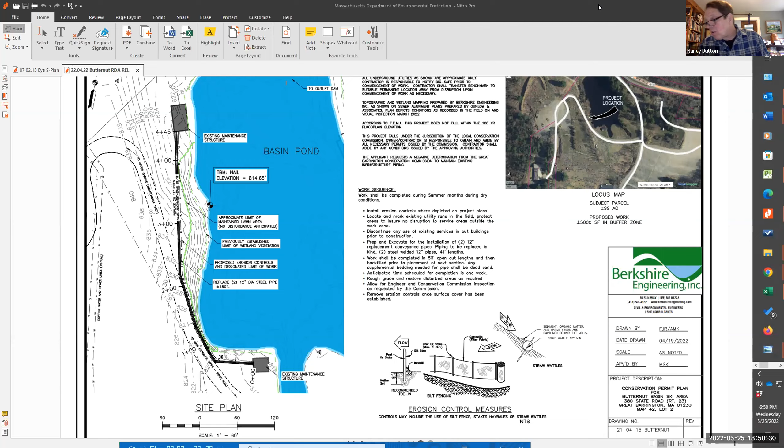Are we ready? Yep. I make a motion to issue a negative number 3 for the notice of intent. I'm sorry, for the RDA. Second. There we go. Okay, we'll vote by roll call. David? Aye. Michael? Aye. Andy? Aye. Andrew? Aye. And I vote aye as well. Thank you all. Thanks, Mike.

Sounded a little like a border collie. At least it wasn't my dog. Well, that's what my border collie says when the UPS man comes.

Okay, let's see. Up next, an RDA from Colin Kemble, property at 275 Division Street, map 33, lot 40U. The work proposed is constructing a single family house and related site work. Who do we have for that? We may not have anybody. So this is the one where they don't have any plans. They just want to know whether they might be able to build a house. This is by AIER, correct? Yes.

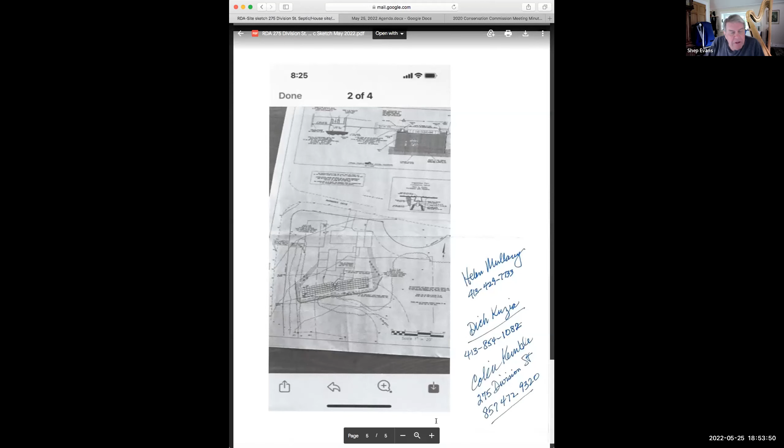That's the idea. The prospective purchaser has filed this RDA, and I circulated to everybody that went on the site visit, and I think to everybody else too. I'm not sure. The aerials from MassGIS and Mass Viewer map, and an excerpt from the septic plan from 15 years ago. There you go, done by Mike Parsons. Excuse the handwriting on the right.

But this is the lot. That's the driveway to AIER coming up on the left, and then the little private road going in on the right, and the curved bit on that road is supposed to be a circle, which was never built. In the meantime, this is an open grassy field. If you look down here at the bottom, that's trees right there. That's big pine trees. And over on the right-hand side, connected to that, is more trees. And everything else is open grassy.

There's an intermittent stream, which is a drainage coming out of Barbieri Pond, which is up to the north, which comes down just sort of through the eastern end of that circle and continues on down. And there are wetlands down below on the left.

Thank you, whoever did that. Is that you, Kate? Yeah. Yeah, good job.

So the idea is this: it's high and dry. If they can keep everything out of the 100-foot buffer zone, of course that's exempt. And if they can get the septic system in between the 100-foot buffer zone and the 50-foot buffer zone of the wetlands to the south, that would probably be allowable. And that's about the best that I think the commission can do, is to say that it looks like it was permitted once upon a time, and there's a good chance it might be, as long as they stay as far away as possible from the wetlands.

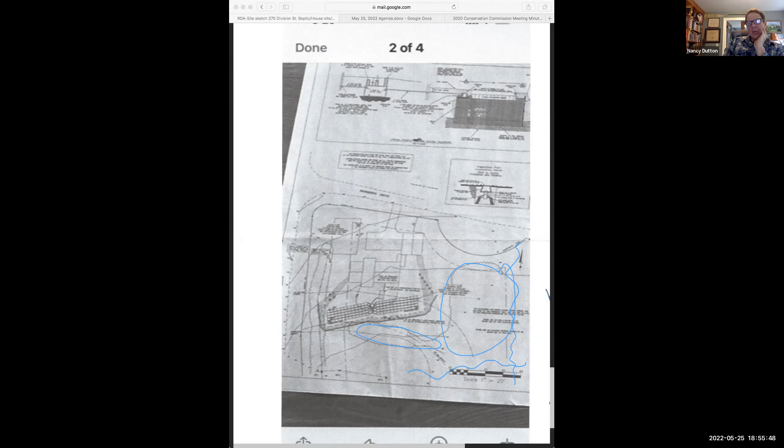When we do a motion, can we really issue... no, we're not really. All you can do in this situation is to issue a sort of an editorial comment in response to the well-intended but not necessarily conclusive request for determination. And this is a 15-year-old map, so that's not helpful, and this is not a building plan that belongs to the potential buyers. So I think we could just say that anyone could build something in an area that's not jurisdictional.

So if we say that the property was permitted before, and if they stay as far out of the buffer zone as possible, then it's likely that we could permit it. But there are no guarantees. A new survey and new plans that are relevant. Right. If it's in general keeping with the previously approved plan, it's something

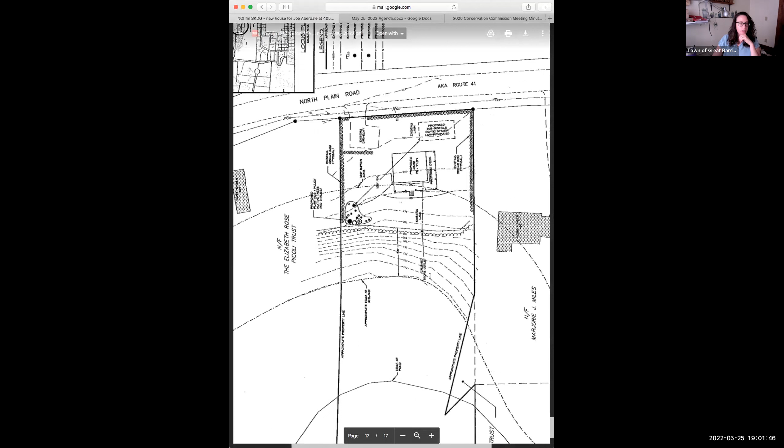Okay, let me see if I can pull this up. There we go. Can you see that? I see it. All right, so go ahead.

So I'll start. Bob Fournier here from SK Design Group. I'm representing Joe Aberdale for this notice of intent. Property at 405 North Plain Road, Route 41. This is to construct an approximately 1,200 square foot house in the buffer zone. Property has about 150 feet of frontage and goes back pretty far out in this pond. The back 2/3 of the property is actually in Hart's Pond. The lot has already been cleared and lawn has been well established there. There's vegetation all around it. So our plan is to simply build a house in a buffer zone. We'll erect appropriate erosion controls at the limit of the cleared area to prevent any unwanted erosion.

We're also dedicating an area in the northwest corner of the existing lawn, right in that area, where we intend to restore that area with some native plantings and trees. I can't speak to exactly why that was proposed. I don't remember, but I know it was a request of somebody, I think, from the commission. The septic system would end up being in front of the house, between the house and the road, well outside of the buffer zone. And the well would be in that northwest corner that I mentioned where the proposed plantings are going.

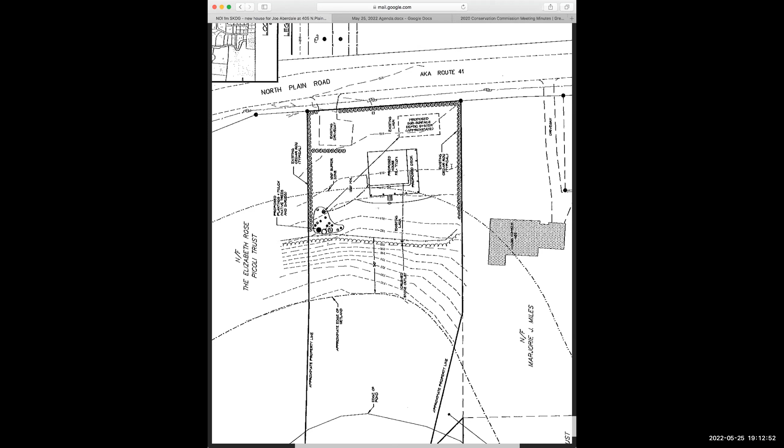Exactly. Usually about 10 feet off of the toe of the slope there. And then if it's going to be there for a real long period of time, it'd be good to stabilize it. So get some seed mulch down on it so that it's not just open. But yeah, an additional silt fence would be good.

I think as a finished build out, I have no problem with the plan. And I know that you're very sensitive to the wetlands, Joe, so we'll just watch that the progress goes according to plan.

If I have one quick question. So say we go through the process tonight and you close the public hearing. How long is the order of conditions good for? Just so I know the duration of construction before we'd have to come back. 3 years. 3 years. Oh, okay. And 3 years, and then if you come back to us before it expires, you can ask for an extension.

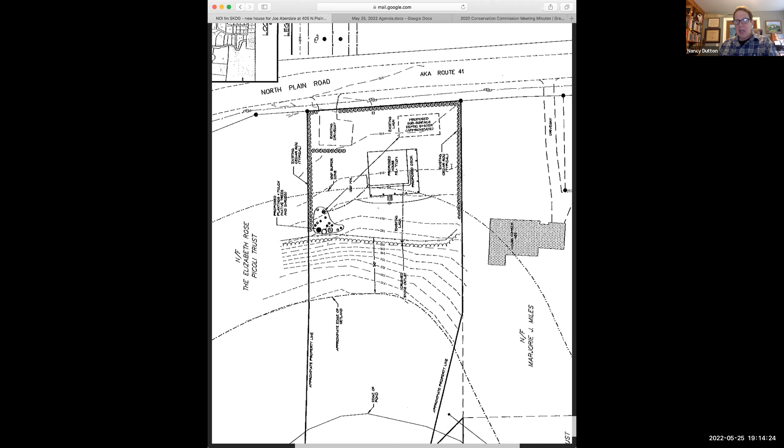Okay, that's perfect. So like if you get the septic and the well in, and then for whatever reason the house doesn't get built, you can come back and go, look, we're going to build the house year 4. Yep. Then we can give you an extension.

Shep, I see you have your hand up. Yes, if you do want to extend the order, you need to come back more than 30 days before the order expires. Okay. I'll mark my calendar.

Not be around that long. No, we just don't want to deal with 11th hour crises. Yeah. Absolutely. Well, you and I seem to touch bases often enough, Shep. Thank you.

Shep? No, this is an order of conditions, not a determination. So it would be an approval with whatever. Andy, why don't you do this, because you had a couple of conditions. We have to close the public hearing first. Make a motion to close the public hearing. Okay. That was Andy with the second.

Michael. Michael got to it first. No, it wasn't me. It was David. David, yes. It was David. Sooner or later, you're going to guess me. All right.

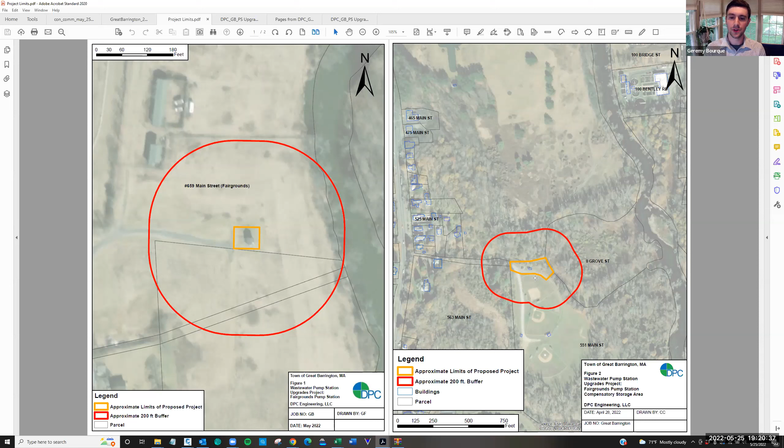And on the right is where we are proposing to locate our compensatory storage. It's at the Olympian Meadows athletic fields. The work area is outlined in orange here, and we'll get into greater detail what is going to be happening at each of these sites as I flip through these PDFs. So the scope of this project is part of a larger project within the town of Great Barrington to upgrade all 4 of their pump stations to submersible pump stations from a suction and wet pit and dry pit pump station. On the left here is the existing site plan and demolition site plan.

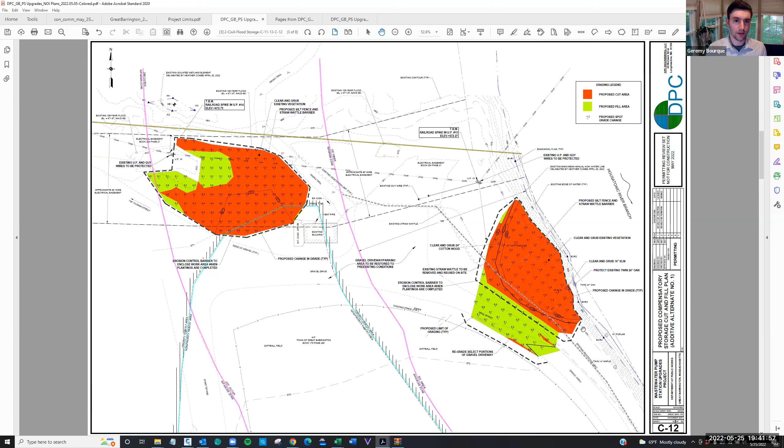Good. Jeremy, can you give us a very quick, simplistic overview, so I understand. I know that you have to come up with the same elevations in a different spot as what you're filling over at the fairgrounds. Right. Can you just give us a quick synopsis of that, that's part of the state regulation, and how it's kind of hard to match all that up? Well, let's see how I can say this.

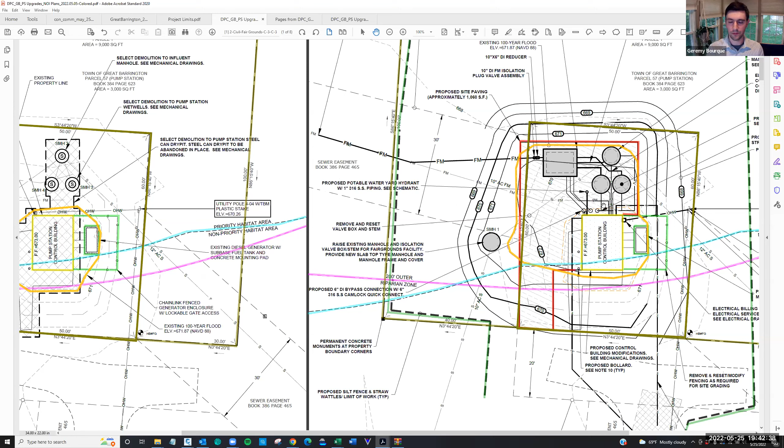So at this site, there's contours 669, 670, 671. Between each foot of those contours, there's a volume. There is also an existing volume for the existing pump station mound. If we take between 670 and 671 for the proposed mound, and 670 and 671 for the existing mound, and we subtract the two, we get a volume that we are adding between those two contours at this pump station. So now we take that volume, say approximately 40 cubic yards, fictitious.

Right. We need to now take that volume out of someplace that's hydrologically connected to the Housatonic River. And so that's what brought me to this site here. And it has to be at the same elevation. So this site is maybe about a quarter mile upriver on the Housatonic River. The reasoning for this site was we had the elevations to make it work, to get that foot of volume that we required. And the property is also owned by the town, so there's no acquiring of land or negotiating with private property owners to make up this compensatory storage.

So it's the same thought here. We take the existing contours. It's a lot more intricate here, but they all have a sort of fictitious boundary, and we get a volume. That volume between 670 and 671 here is, say, 60,000 cubic yards. But then we look at the proposed one and it's 60,000 cubic yards minus 40 cubic yards. And that's where we would get the volume, if that makes sense. That was a great explanation. Thank you. Yeah, absolutely. That was good. Thank you.

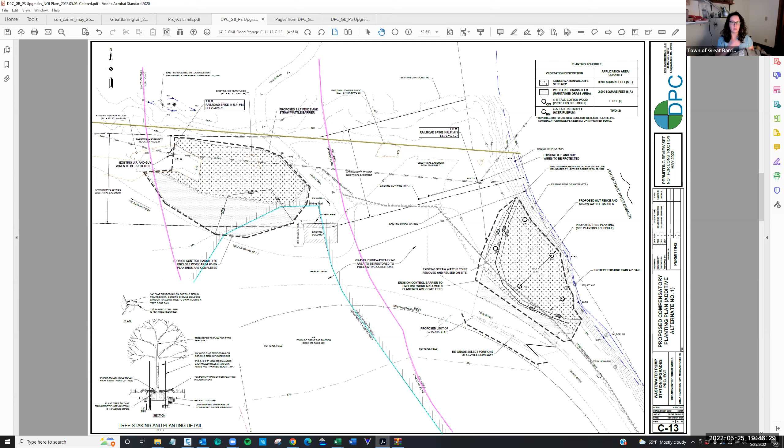Okay. But altogether, good work. I can see how that took a lot of mental gymnastics to figure out those cuts and fills up the river there. So altogether a good and much needed plan, it sounds like, for that pump station. Absolutely. So make a motion to continue the public hearing. Second. Thank you. And we'll vote on that. David? Aye. Michael? Aye. Andrew? Aye. And I vote aye as well. So we should be back here again next month. All right, great. Okay, thank you, Jeremy. Yes, thank you.

Okay, where is my agenda? There we go. All right, we opened a public hearing and we closed it. We opened a public hearing and we continued it. Now on to discussion. Item 1, a draft letter summarizing the Commission's November 29th, 2021 site visit to several properties within the mapped scenic mountain area along Castle Hill Avenue, continued from February 23rd, 2022. I'm going to recuse myself from this.

Oh, did we lose David? Maybe. Yeah, let's see. I don't see him. Oh, here we go. He's here, but he's an attendee. He should be joining us again momentarily. Oh, there we go. He's muted. There he is. Hey, okay. Well, I don't know what happened either, but we're glad you're back. But Andrew's gone now. Andrew has recused himself. Oh, that's right. So now we're looking at Nancy, which is fine. Now there are three of us. No, it's only a discussion.